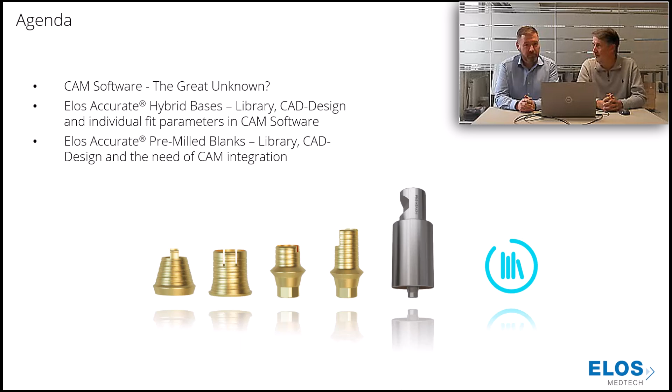Perfect, it's going to be great. Okay, coming to the first point of the agenda, I call it CAM software, the great unknown. As I already told you, digitization has been making its way into dental technology for many years now, but we are still more often familiar with analog processes.

I think we have a long process chain of CAD-CAM: we have CAD software, we have CAM software, we have machines. With CAD software, as a dental technician, you are much more familiar, because you just exchange the instruments with a digital one, using the mouse instead of the instrument. But coming to the CAM workflow, it's much more associated with the job description of a CNC technician or mechanical engineer.

That's why we want to focus on the CAM application in today's webinar. And we have a guest today. We have Iago from CIM System on board, and he's going to provide us with some interesting insights into the MillBox CAM software. Iago will first discuss the more general functions of the CAM before we later talk about the application for milling hybrid abutments and pre-milled blanks. So please go ahead, Iago.

It's your turn. Thank you, Rolf and Casper. I'm very excited to be here and be part of this webinar together. I will tell you a little bit about myself and the company as well. My name is Iago Leal. I am one of the engineers at CIM System, and CIM System is the developer of Millbox CAM, the easiest and better dental CAM software that we have on the market right now.

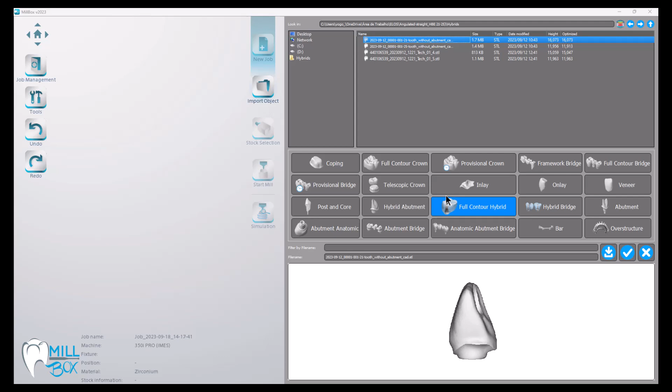All of these cases will be full contour hybrid, screw-retained crowns to be used with tie bases. And here I have 2 files from 3Shape, those 2, and 2 files from ExoCAD, those 2.

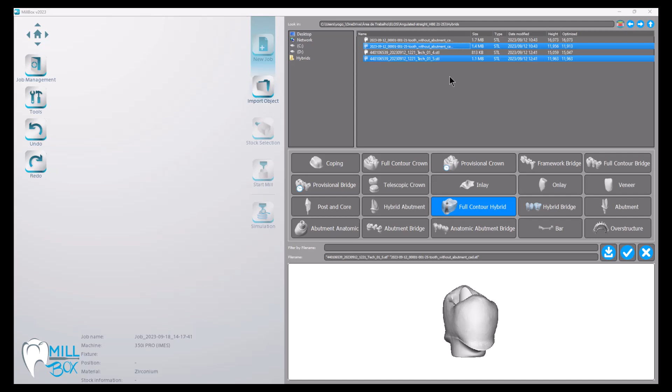The files from 3Shape, I maintain the metadata, but the files from ExoCAD, I remove the metadata to show you that Millbox can handle files without metadata, and it will automatically create all the curves and surfaces necessary for the milling during the import. So after the selection of our files and the correct restoration type, we can confirm and proceed with the import.

Here we can check that the software properly imported the files. So in this stage, we'll select our stock.

By taking a look at the top, we can see the minimum thickness required for this case, which is 11.96. So we'll be using a 12mm disc.

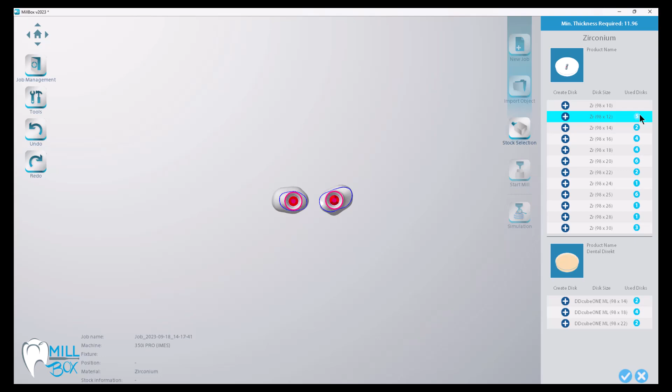I have 5 on my stock. I can click here, and the software will suggest to me the disc with the highest percentage of use that will fit all the restorations that I have imported for this project. Here it selected the 37% of use disc.

If I need, I can select a different disc as well. I will proceed with this one, so I will confirm. When I confirm, the software will nest my parts and will place the support pins.

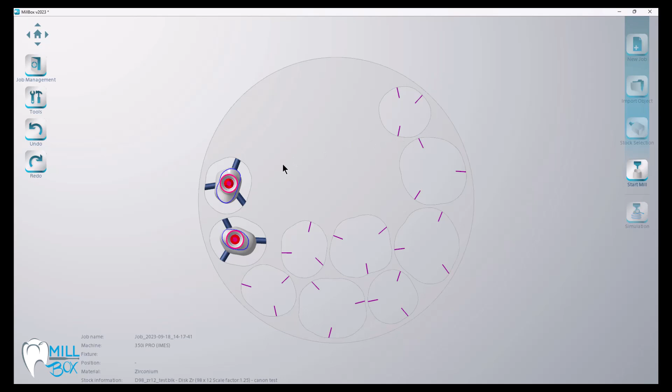If I want to mill like this, I can proceed and save a toolpath, create my NC file and start my milling. Otherwise, if you want to change something on the nesting, you can do it right now. So if you want to move your parts, you can simply drag and drop your STLs. If you want to rotate, you can use the yellow arrows to do so.

And this is an easy step of the software. So for the support pins, it's the same thing. If you want to move them, you can just drag and drop where you want the pins to be.

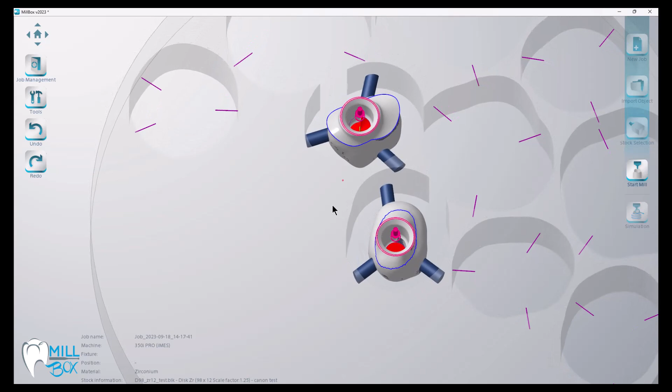We have 3 types and 3 shapes of support pin. Regarding the shapes, we have the round ones that you can see here. We also have the rectangular ones. And we have what we call the smart pin, that is this one here.

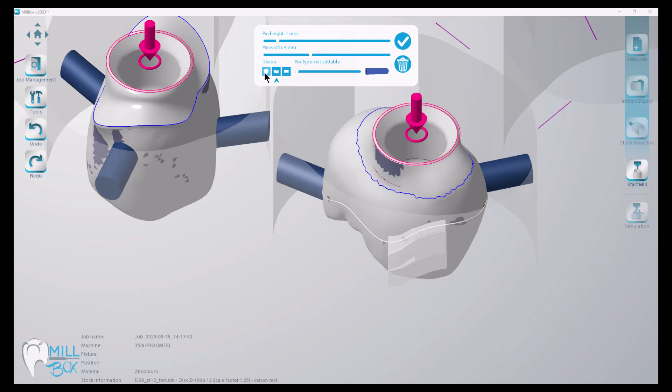When you click here, as you can see, the pin will try to follow the equator line to avoid undercuts. In this case, I will use the round pin.

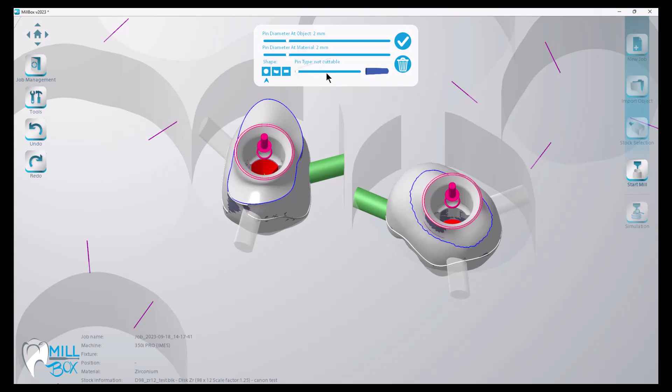For all of the pins, I can also determine if I want to cut them, do a semi-cut, or not. So I will define 2 of them as entirely cuttable, the green ones, and the rest of them, instead of selecting not cuttable, I will use semi-cuttable. So at the end of the milling, the software will do a pre-cut on those.

After I finish with my nesting, I can proceed with the milling and click on Start Mill and Save Toolpath. The software will display some strategy options available for this material, restoration type and machine.

If you want to have a better understanding of what that operation is going to do, you can click on the eye to see the toolpath it's going to use, like in this case, anatomic details.

And in this case, I will select the undercuts option to remove all the undercuts on my parts. And I will also use the 0.3 millimeter setting for anatomic details in this case.

Once I confirm, the software will start the calculation of my strategy, and it will display to me the tools that are going to be used for this case. So make sure that you have all the tools available at the machine side in order to proceed with the milling properly.

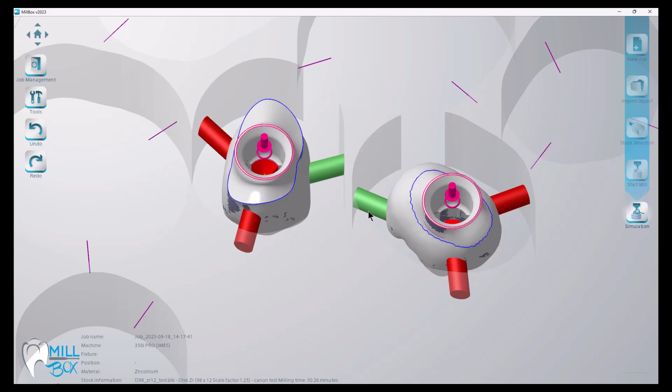After the calculation is done, it will display a message informing the path where it's saving the file that you need to mill the machine. After that, we'll have two types of simulation available for us to use.

In this case, we have kinematic simulation and residual. We're going to use residual to evaluate this case here.

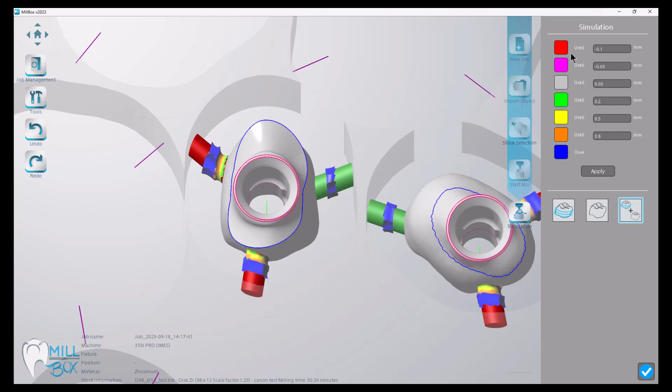Once the simulation is done, we can take a look at the cavity area of our screwed-in crowns and see if we can find any color different than gray, which would correspond to a millimeter we see here on this window. So by checking here, it seems that all we can see is gray inside of my cavity areas, which means we have no material left behind internally.

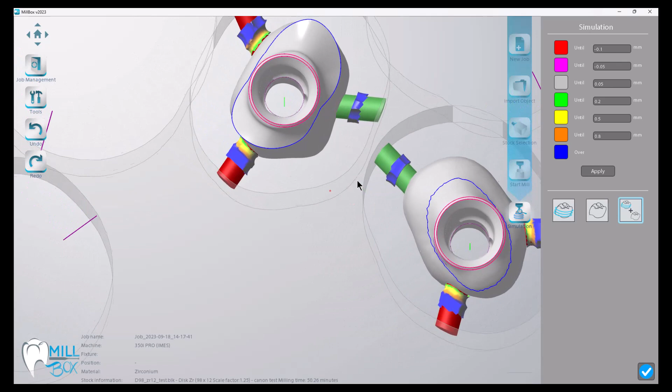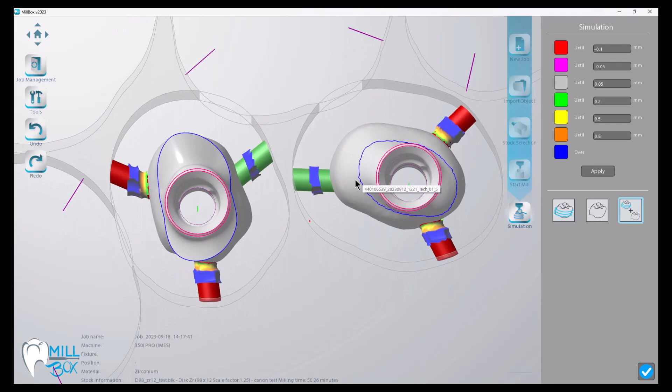The toolpath that was created for those cases properly milled the internal cavity of these two STL files. This tells us that we can expect a good fit from the milling of those cases, regarding the shape of those hybrids. We can confirm, and then take that STL and start the mill.

And now I'll return to you, Casper and Rolf, so we can discuss the next subject.

Thank you, Iago, for the interesting insight into MillBox CAM software and its basic features. So let's look at the next point, the Elos Accurate Hybrid Base itself, and talk about how the fit parameters are predefined in the CAD software and what you should pay attention to within the CAM software.

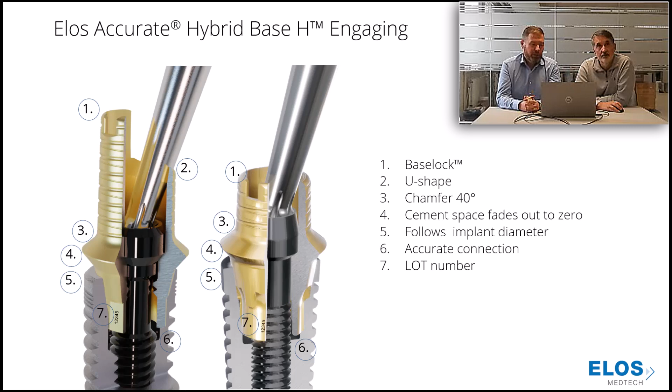Yeah, that's a pretty nice feature, I think, especially for a dental technician, because usually you finalize your bridge or your crown and then glue it, then give it to your dentist, who puts it in the patient's mouth and sees there's probably something to change, but it's still glued onto the titanium base. So this makes life much easier in the dentist office.

And again here, this small spring effect that we have is also tied back to the CAM software, because it needs to be exact.

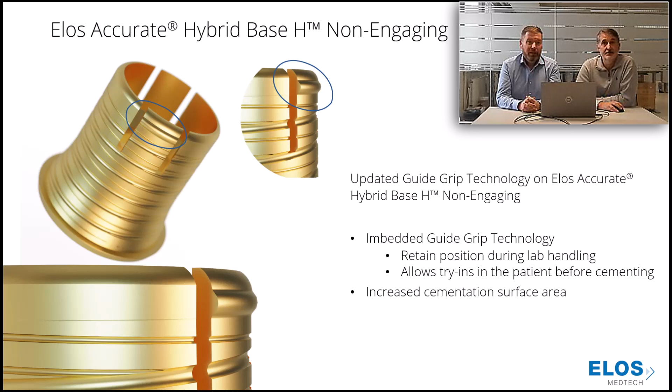Right, it has to be milled with the standard tools which are implemented in the software, right? Exactly. And if you look at the last slide here, we just look at the features.

Here we have the non-engaging. Again, we have the generation 1 and generation 2. And notice again the retention grooves on the side of it. This is a key feature when it comes to the retention. And we have our angulated screw channel. But let's look more into how the digital file actually works.

Yes, okay. So we talk a lot about the physical base now, or the hybrid base, but what about the use in the CAD software? Yes, and we would like to dive much deeper in the associated hybrid base CAD library and why the fitting parameters for hybrid base are predefined in it. Yeah, so there's still a cement gap predefined. So it's quite different to the cement gap you usually define with your crowns and bridges on dies, right? Yes, exactly.

So for us, it's very much important that we have our cement gap. The mating surface is predefined. Now, if you have a look now, this is just showing how it is integrated in the library. So you see the green colored analog and the hybrid base on top. But this is the crucial file. Yes. Even if you are not really aware of it because it's not the physical part.

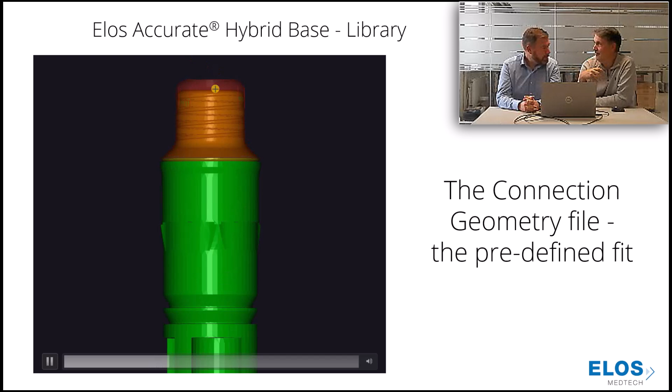We call it the base file or the connection geometry in the library. And this is how the internal geometry of your cavity in your designed abutment works. Yeah, so you have already predefined the cement gap and everything. Yeah, so this connection geometry file actually dictates the merge between the anatomical design that you're doing and the internal connection that will be inside the restoration. And this is governed by the library.

And as you mentioned, like a normal crown where you can set the cement gap yourself, this is not possible here. Here it's governed by this file in the library, and we have preset a cement gap thickness of around 40 microns. And we have, of course, done a lot of studies to show what kind of cement gap is actually needed to have the optimal retention. And that's why we have this exact file to make sure that we end up in a situation where we have the cement gap needed.

And what's also important here is to mention that it, of course, needs to be designed so it can be milled with your standard tools. Right. Therefore, you need this tool radius compensation, right? Yeah, so what you see in the gap above is that, of course, we need to mill the locking area, but we also need to make sure that the tool machines the entire connection geometry for the hybrid base. So that's why we have the gap above. This has been made so it can be milled with a 1 millimeter tool. So all radius here is 0.5.

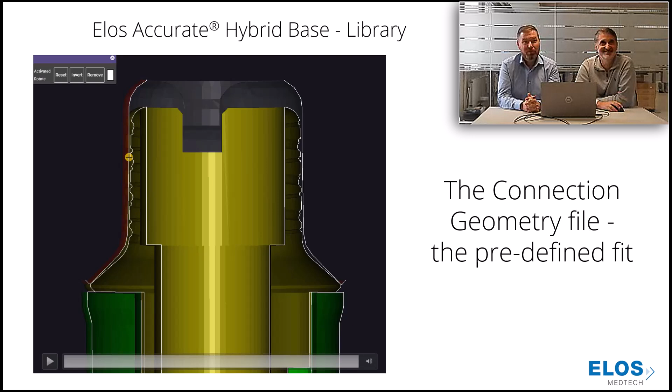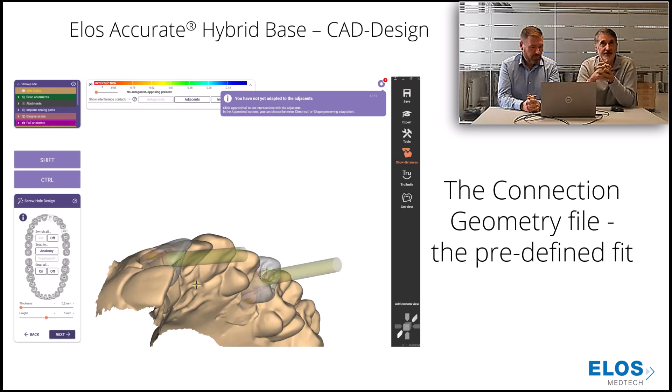So, okay, but how does the predefined base file appear in the design process within the CAD software? So let's have a quick look into it and how the internal fit of the designed abutment is created inside the CAD software. Yeah.

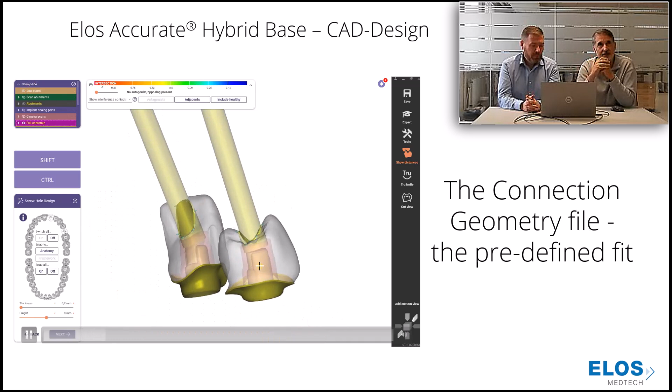So here you can see, I don't go over all the design process with matching the scan body. It's just to explain how this predefined base file is pictured in your later CAD output. So if you see here, we have some angulated screw channels, we have some straight screw channels.

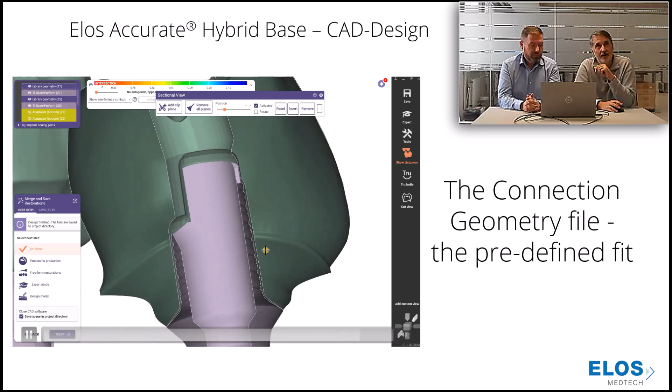And if I fade in the, let's say, physical hybrid base into this software and make a small section view in it, you can see that this base file geometry is already pictured in the same way in your abutment. So let's go to the section view and scroll a little bit, zoom in. Okay. Now you can see we already discussed it in the library, and that's what the library is creating in your final abutment.

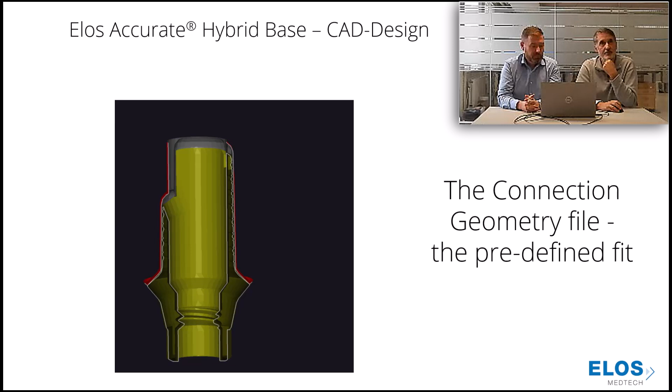So here we're merging the anatomical design with the governance file from the library. To make it a little bit clearer, I superimposed the final abutment with the CAD library. Okay, so this is the library? This is again the library, and you see this gap, and you see a section view through the hybrid base and its gap. And when you superimpose it with your final abutment, you see you already have the same gap now in your cavity of the created abutment, right?

So you know, maybe also from the customer support, that different technicians, different labs have different fittings. We have a lot of different zirconias in the market. We have a lot of different tools, a lot of different milling strategies, a lot of different sintering processes. And even if we try to optimize this base file, the cement gap, also based on our cement study, you can never balance it so that everyone is happy with the same cement gap.

No. And for sure, you can't change it in the library. That is governed. And as I mentioned, we're aiming at a 40 micron cement gap. What we have done with the mating surface of the connection geometry is that we actually put it at 60 microns because we want to ensure that we take into consideration the milling situation. It could be the accuracy of the burrs being used, the accuracy of the machine, the calibration, and all that. So we have some gap to play with.

I think it's maybe comparable with the 3D printing process today. When you have a model with dies in it, and you have different printers, different resins, different post-processing processes, at the end it hardly depends if you have an SLS or SLA or whatever printer, your result is always different. So you need to optimize the process or the settings to your individual process.

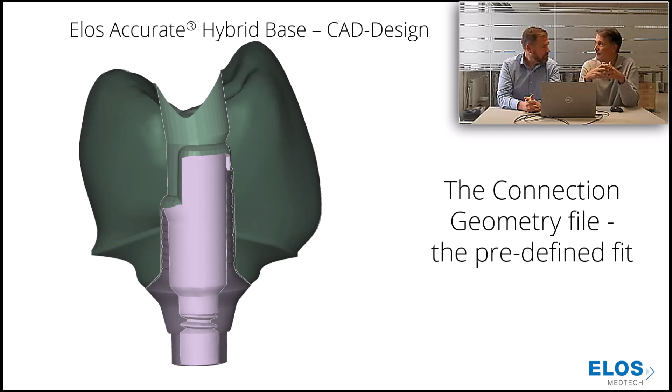And therefore we would like to go back to Yago to show us how a user can optimally treat such hybrid abutments in the CAM software. So what features the CAM has for this purpose, and also how the fit of the abutment on the titanium base can be optimized in the CAM software and adapted to your own individual manufacturing process. Yes, for sure. Let me share my screen and we can discuss a little bit about the HBE, that is the hybrid base engaged files.

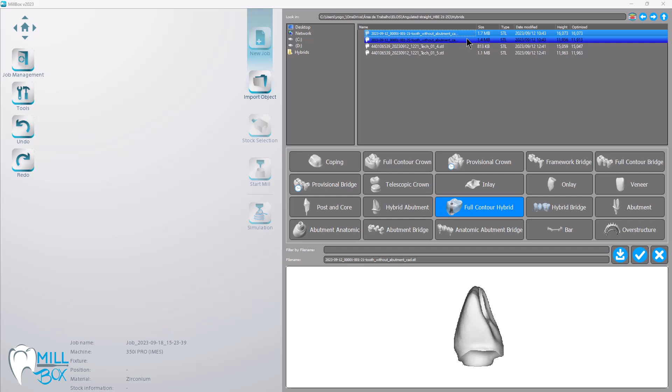So same as before, we can click here at new job to start our case. I'll proceed with the name of this job like this. You can select your milling machine and make sure that the tool set that you have selected here is exactly the same one that you have at the machine side. Select your material and then scroll down and select the fixture that you want to proceed with this job. Here in this case, I will import two cases from Exocad, selecting the proper restoration type. This is very crucial.

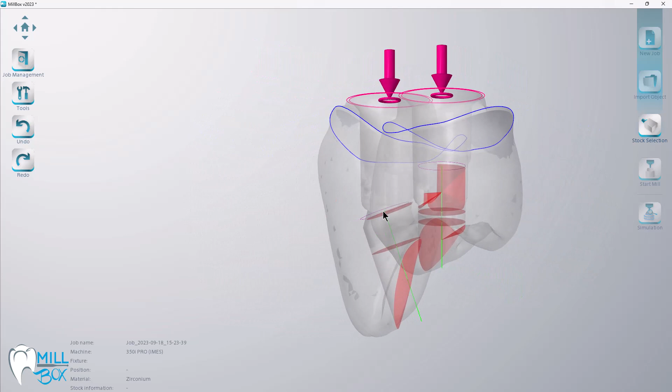So here, instead of proceeding with the selection of the disk, I will cancel, and I would just make sure that all of my curves are properly identified here in this case. So for hybrids, there are three main curves. The prep line curve, that is the margin line, this pink curve here. Another important curve is the drilling axis, that is this green arrow on your screw channel. It needs to be exactly on the center of your screw channel.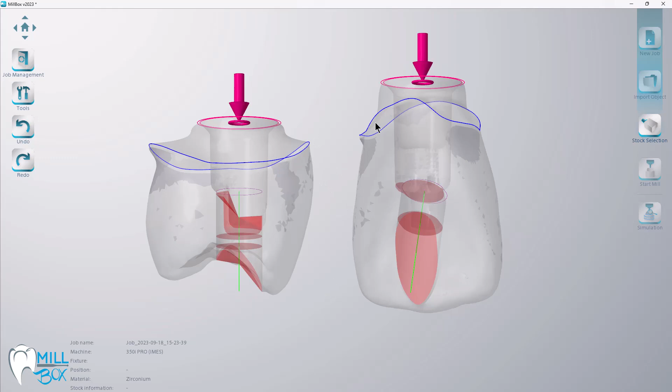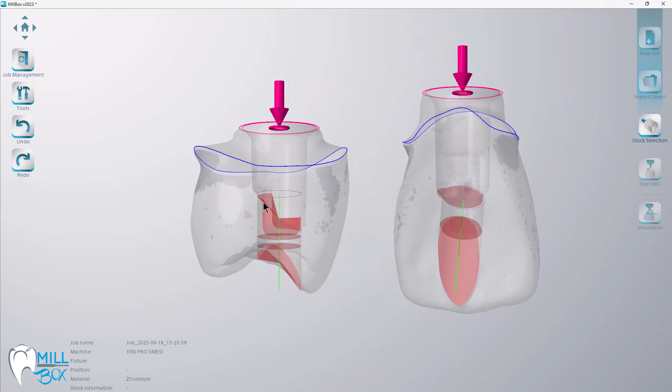And also the red caps closing the screw channel. They need to be at the top and at the bottom part of the screw channel, like in those cases. We also have a non-mandatory curve here. This blue one is just to identify the emergence profile area, but this is not mandatory. So one important thing here is to check if you have the red caps properly assigned. There can't be any red cap inside the cavity.

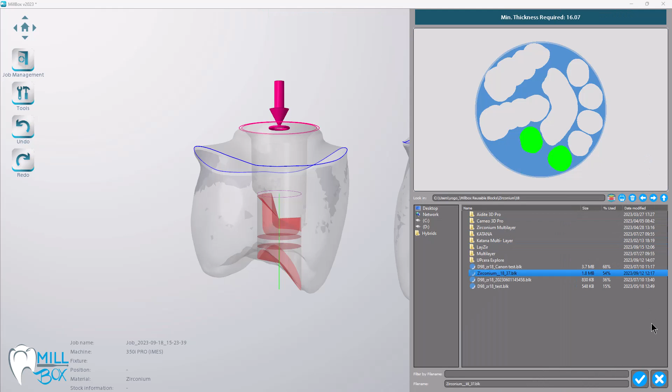After that, we can proceed with the selection of the disk. In this case, it's a 16.07. I will select an 18 height disk. I'll just confirm here. And then I will cancel. And then let's discuss a few things that you should be checking here.

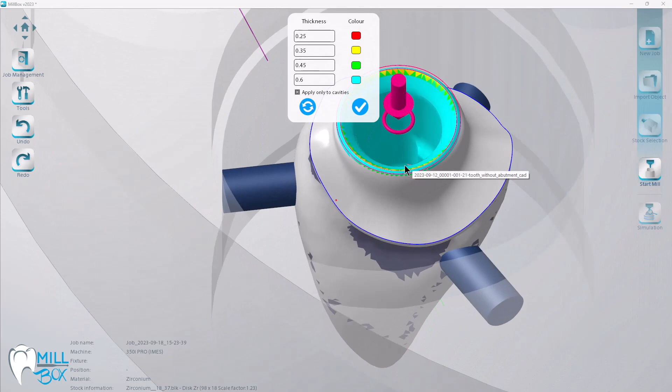So if, by the way, you are having chipping, of course, you need to check your machine and your tools. But it can be that the areas of your restorations are thin. So in order to check for the thickness, you can click on your part, click on the tools, and you see this option here to check the thickness of your STL file. By default, it will apply a color map regarding the thickness values that you have here. And then you can check for thin areas by checking the color map here.

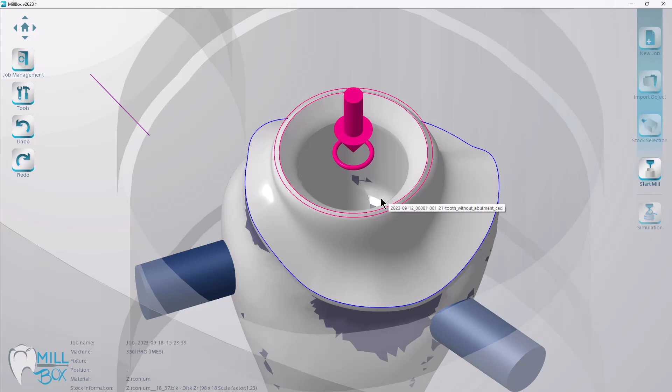Here, this part seems fine. You can also unclick this option to apply the color map on the external areas and see if you have other thin areas. If you're having tight or loose fits with your Ti bases, you can also apply a cavity fit in the software. You can click on your restoration, go on Tools, and then select this option to adjust the cavity fit.

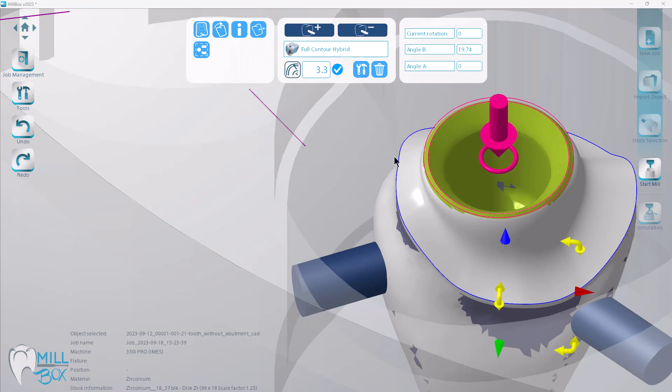And here you have values to control the fitting of your cavity by applying plus or negative values. Negative values will make your part looser, like the arrows, and positive values will make it tighter. So you can select one of the options here and make your part looser in this case. And as you can see, the software will display a different color to show you that you have a cavity fit applied in that restoration. And of course, you can apply it to the other restorations as well.

This is very useful when you're milling hard materials, usually like PMMA, for example, where the tool tends to deflect a little bit more and you have tight fits. So this is a really good feature that we have in the software to control the cavity fit. If you need, you can increase that value as well. And you can also determine this value as default for the software. When you import those types of restoration, it will apply during the import and you don't need to apply it manually after you import that part.

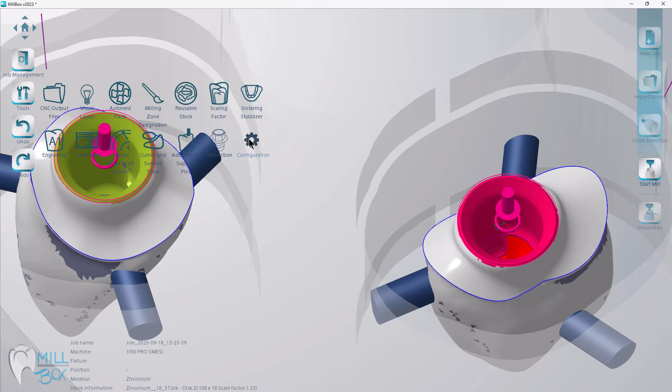In order to do that, we need to go on Tools and then Configuration. And then here we'll have an option for cavity fit. And you need to select the material that you want to apply that value as default, and as well your restoration type. So in this case, we'll be selecting full contour hybrid and we're going to apply minus 0.025 millimeters as default.

If you need bigger values or different values, you can also click on these green buttons in order to change the values that you have here. So for example, here let's change to 0.07, 0.06, and then 0.05. And if you go back to the software, you see that you have those values now available for you to select.

Okay, thank you, Iago, again for this interesting insight into the CAM software. As we can see, the CAM software is not only an application to calculate the milling path, it's also a powerful tool to adapt the milling results to your individual needs, right? So, last but not least, we will come to our latest development, the Elos Accurate Pre-Milled blank. I think the main difference to other abutment applications is that you not only need the pre-milled blank as a consumable material, but also need a pre-milled holder to process it.

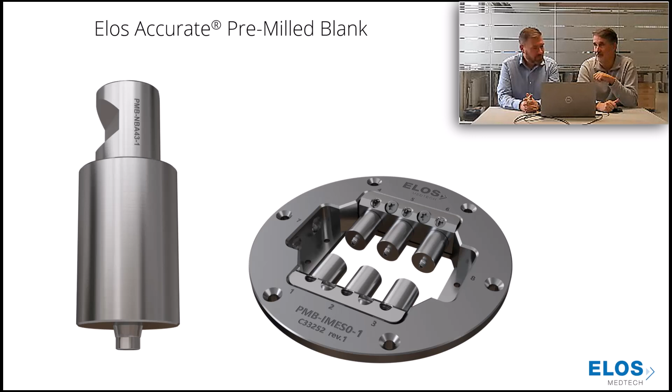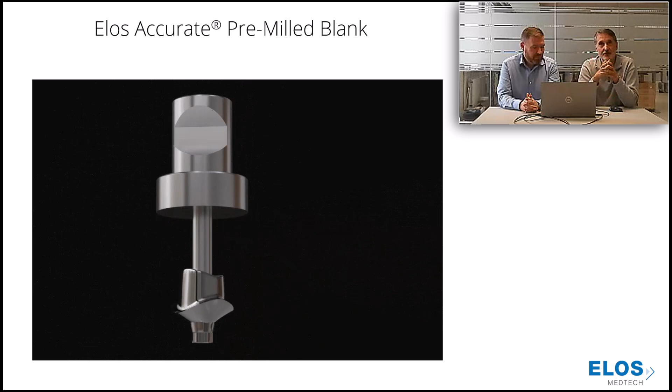So the pre-milled blanks allow you to design and manufacture one-piece titanium abutments in an easy in-house process. So when we look at this animation, you see that only the upper freeform portion needs to be milled out of the milling cylinder. So the implant interface is prefabricated. Meaning its higher precision and fitting accuracy to the implant is already defined and specified, right?

Yeah, exactly. So that means as an end user, you can easily focus on the individual abutment design of the upper part without having to take care of the fitting to the implant since it's already prefabricated. Exactly. So why use a pre-milled blank? Why is there a need for a one-piece titanium abutment? So what is the indication to use it?

So we all know today that ideally the abutment should follow the anatomical later prosthetics, right? So in the sense of a backward design, it has to take into account the individual anatomic conditions of the patient. So what are today's alternatives? Let's have a look at the stock abutment here. And we see with the stock abutment, you never follow the natural gum profile, right? So you have a lot of disadvantages in using stock abutments. They are often under-contoured and so give really poor support for the prosthetic crown. Okay.

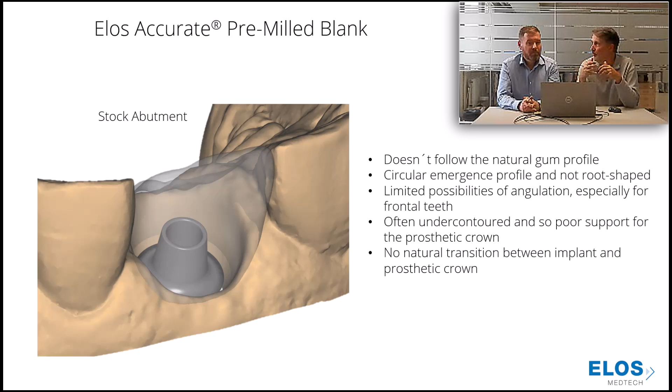But then we have our Ti-base solutions. We just talked about a hybrid base, and it creates a lot of advantages doing very aesthetic and individual customized abutments. But I guess it's not for everybody. Yes, I think it covers a lot of indications at the end. But however, in some cases, this may not be the ideal solution, even if it allows you an angled screw channel like Elos Accurate Hybrid Base.

Yeah, so for example, you see it a little bit on this picture. Sometimes you have very limited space. And then, due to the minimum wall thickness of both the titanium base but also zirconia, you need to have wall thickness, and so the abutment will be thicker than you probably need it. Also, you have less design freedom in case of very angulated frontal teeth.

Of course, yeah. So especially in the frontal area, sometimes you have very narrow gaps. And then if you put in a hybrid base and add on the minimum wall thickness of a zirconia abutment, it fills the gap completely without having the crown on it. Yeah.

So when we look at a pre-milled abutment, it can offer you a very good alternative here, as it allows you to set the starting point for the angulation of the abutment almost closer to the implant shoulder. Okay. So it also offers very good stability when the space is limited, because there's no need to combine different materials. Okay. So that's the whole philosophy about the pre-milled blank.

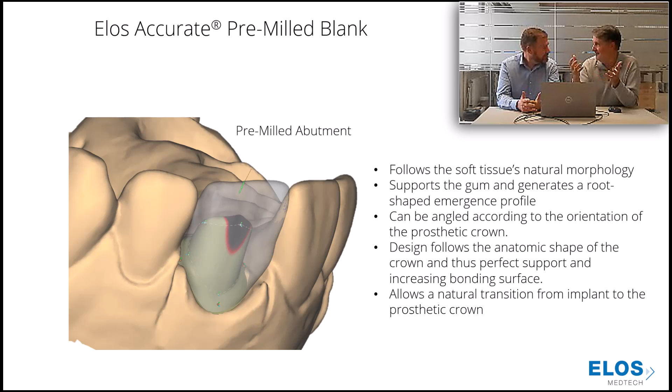A little more design freedom in these critical areas. Yes, more angulation of the abutment itself, not just about the screw channel. Yeah, also more stability in cases you have limited space and so on. Okay. Yeah, you create, so to speak, your own gingiva height. Yeah. You can say that. So more freedom. A little more freedom. That's good.

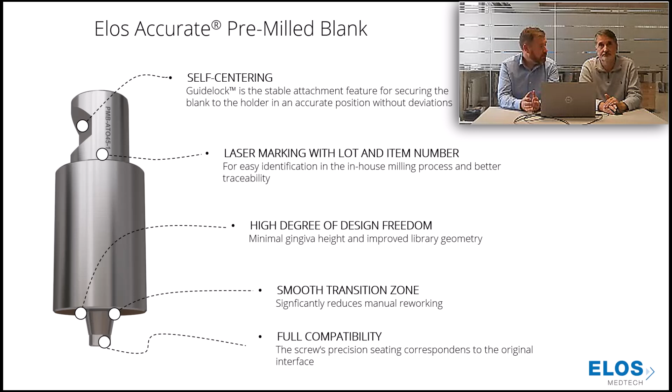Okay, so just a quick glance at the new Elos pre-milled blank. We have a lot of features here. We're not going to go into the details, but we have our locking area, which is important because we need to know exactly where the pre-milled blank is in its holder. And here we see the holder with the pre-milled blank. And again, a lot of features. This is not what we're going to go through now, but here we see the modular system that we have.

And what we're going to go into next is the importance of actually making sure that the machine knows exactly where the position of the pre-milled blank is and where the abutment that you design actually fits into that. And that's the whole integration part about this pre-milled solution that is crucial, and where the CAM plays a very big role. Right. So it's not just about the precision of the physical parts here. No. It's also about how accurately it is implemented in the CAM software.

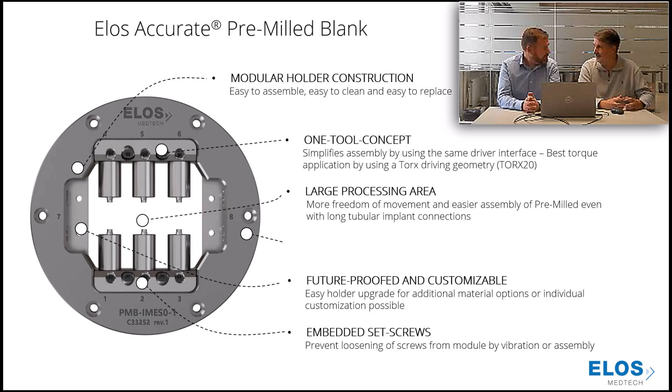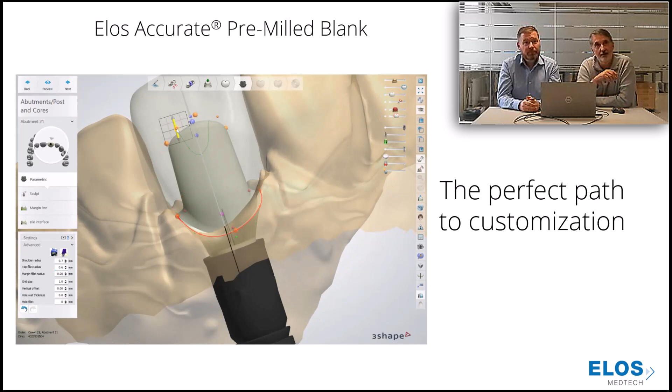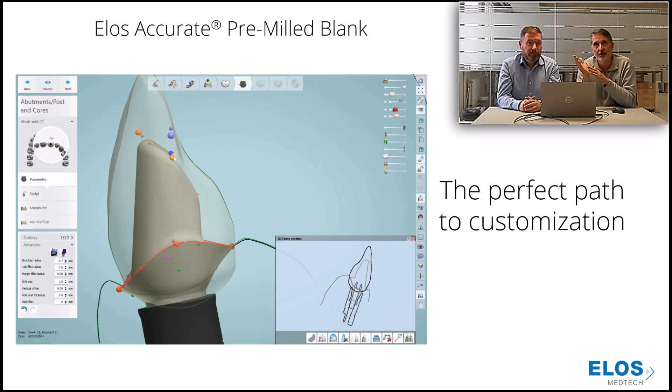Right. Exactly. Let's have a brief look into the CAD software, how to create this abutment. You see, after you positioned your anatomical tooth, you are allowed to design exactly your abutment following the angulation of the crown axis, and you can see in the section view that you can easily shorten it, angulate it, adapt it to your anatomical outer shape. So the tooth is like a digital shell around, and you can adapt the abutment very easily to it.

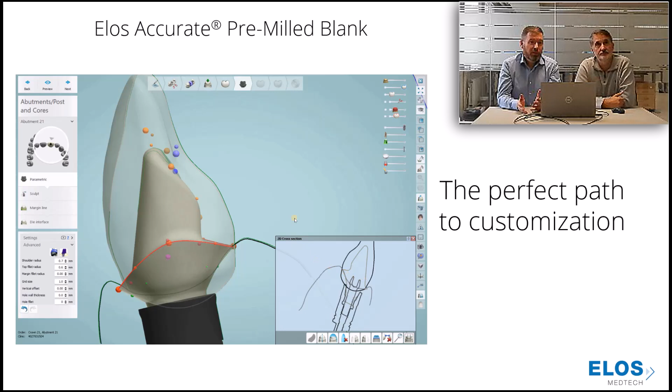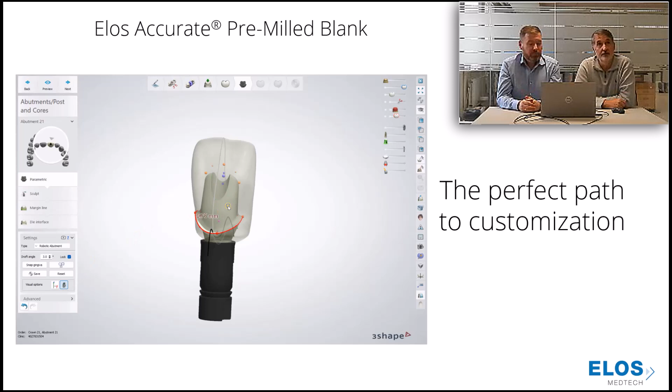Okay, so this gives you a little more design freedom, and you can do a little more customization. Right. But you also need to be able to actually machine what you design. Yes, right. And you see here in this case, you can create your own gingival height, as I told you. So that makes it pretty nice to support the gum and to relocate the cement gap to the upper level of the gum.

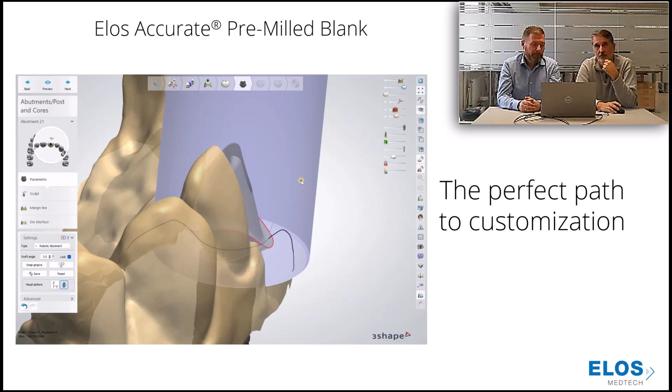Now you see the pre-milled blank and how it's finalized with the screw hole on it. Okay, as we already learned talking about the features of the pre-milled blank and the corresponding holder, the correct positioning during the milling process is one of the most important requirements here.

Yeah, absolutely. So in order to prevent the blank from being positioned incorrectly in the XY plane, we have designed these green marked areas in the holder module and blank, so that the blank is always fixed, stable, and clearly positioned in the holder. Yeah, and this ensures us that we have the blank where it needs to be. Yes, right. So now we need to tell the machine where the blank is. Yes, right. So the same we have for the height offset.

So an offset in the Z plane would result in an abutment shift, meaning that the height of the abutment would be too high or too low, and that it's maybe not in the right position relative to the prefabricated implant connection. So this small animation shows you how the blank is automatically pulled down to the module, into the position, which is not just important in regard to the physical position of the blank. It's also important that this position is also the same in the CAM software.

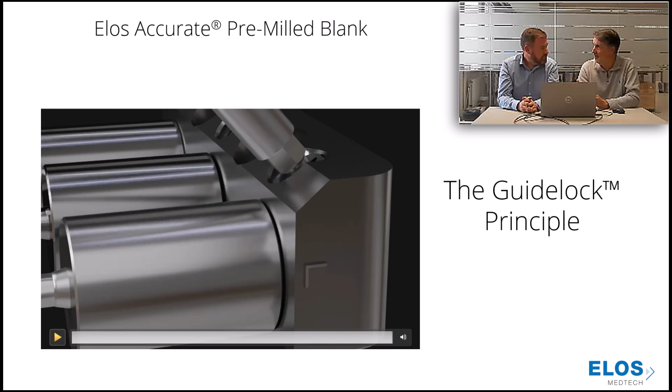Exactly. And this easily bridges us to the CAM software and the importance of the correct position of the pre-milled blank inside the CAM software, not just in the machine. No, exactly. So let's have a look at that.

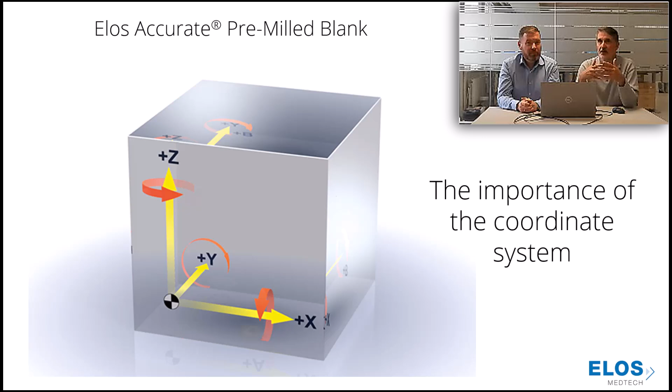So from a mathematical perspective, whenever we talk about the position of any object, we are always talking about coordinates of an object, right? So you may know this topic from your GPS tracker, or for example, a chessboard is also a coordinate system. It's a two-dimensional coordinate system where it precisely describes the position of your figure on the chessboard, right? So since each position of an object in a milling machine has a specific coordinate, a reference system such as a coordinate system is required as part of the kinematics of the machine.

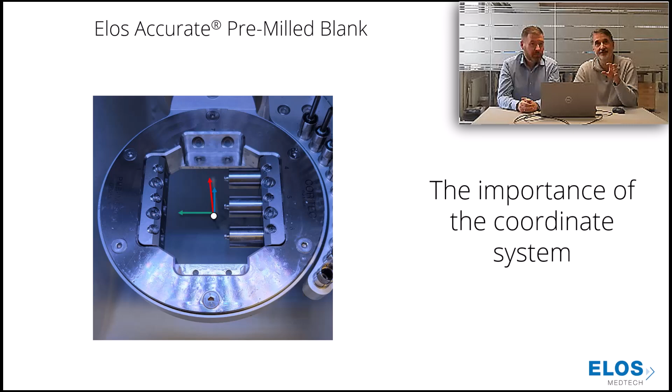So how does this really look? And now you see how it looks in the machine. For sure, the coordinate system is not visible like in this picture. But since the milling paths for milling the pre-milled abutment are calculated in CAM software, each individual position of the milling tool in the milling path is a single coordinate. And if we superimpose it with the CAM software, you see you have the same coordinate system inside the CAM software. So it has to match to the machine, because otherwise the milling paths are calculated in a different position.

Yeah. So the CAM software doesn't know what position the machine is in. Yeah. So we have two coordinate systems, one in the CAM software and the other one in the machine. And it needs to align perfectly to have the desired result. Right. It has to exactly align and match. Otherwise, you have deviations in your milling result.

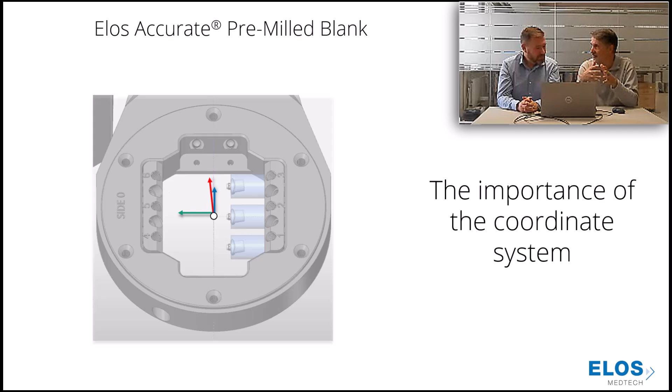Okay, Ralph, so what happens if these things are not aligned? And I guess we will see something of what you display here. Yeah, it's a bit dramatic pictured here, but at the end, you will have maybe a poor surface of your milled abutment. Or in worst case, you probably have a tool break or a collision inside the machine.

So it's important to remember that a holder and a pre-milled blank must both be manufactured very precisely so that the blank is always positioned correctly in the holder and that the physical position of the blank corresponds to the already defined position in the CAM software. Yeah. So that's the manual handling here. You need to make sure that the pre-milled blank is in the correct position.

We need to make sure that everything is clean, so you actually have a good and precise seating area. Right. So if you have grinding chips inside the slot of your holder or whatever, you have to clean it before, because otherwise the position in the machine is different to the position the CAM expects the blank. And then you will not end up with what you actually expected. Yeah, that's right. So what are we seeing here?

Yeah, I think when you create your design in the CAD software, you're always really focused on the STL file. So everybody knows when I create a crown or a bridge or an abutment, you get an STL file. And that might be the most important file for you because it shows you the design. But on the other side, it transfers no additional information. It's not really a CAD file. No, it's a point cloud on the surface. It's a triangulated point cloud, not more. And it gives you no information about the implant system you have used, or what orientation.

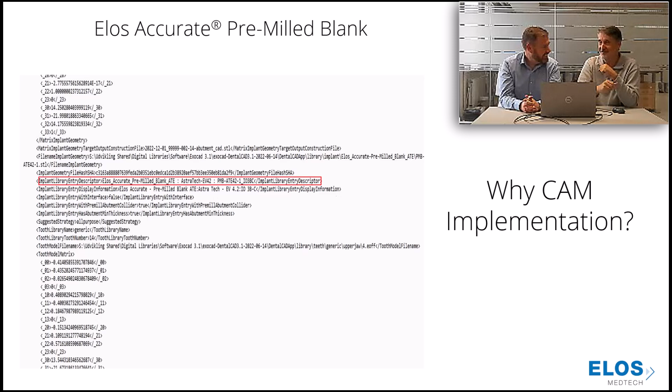But if you look in it, you see this implant descriptor line. This is, for example, the keyword the CAM needs. So when we talk about CAM implementation, this keyword has to be implemented in the CAM software.

And then when you import later your CAD file with the construction info to get the metadata, the CAM reads these XML files and tries to find the right keyword. And if it finds the already known keyword of the CAM, then it matches - it easily knows it has to call from the database the right blank.

So if it's a Straumann bone level, for example, the keyword says this is a Straumann bone level, it's the Elos Accurate system. The system automatically calls up the right folder and so on - everything is automated, and it will also automatically place it in the right position. Everything is automatically nested.

So we talk about a lot of complexity here with CAM integration, but it's just to give you a small picture of how it works. In daily work it's much easier - we just import it, and it's a fully plug and play process.

But I guess Iago is going to show us how it actually works. Yes, right, Iago will show us in the CAM software how easy it works. Iago, let's go.

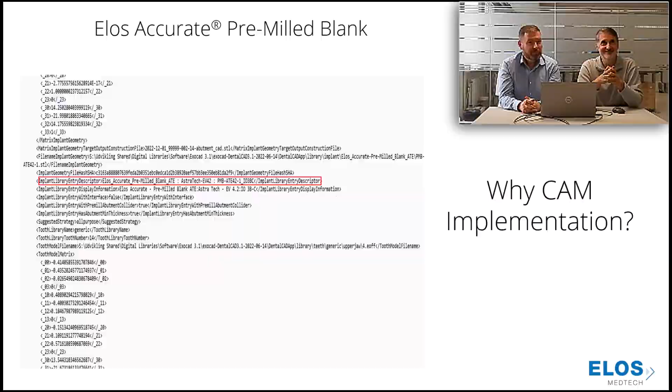Let's discuss a little bit about the pre-milled blanks. The workflow is pretty simple and very similar to the other workflows we have in the software. First we need to click on New Job, select our job name - in this case I will select the 350i Pro machine. For the pre-milled blanks, I will select titanium material.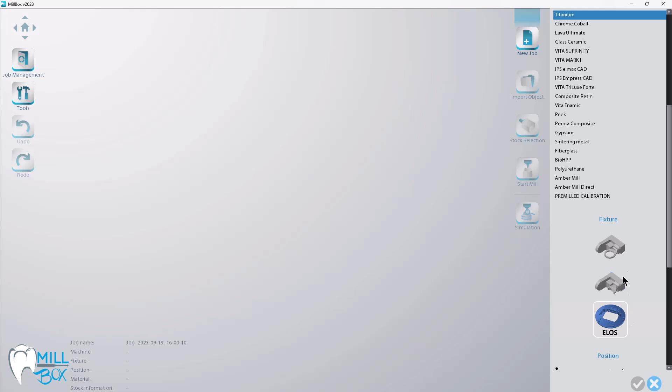And you should have the fixture - like this is the Elos fixture - it should be available for you if you have this on the software. After selecting the fixture, you can select the position. For this fixture specifically, we have 6 positions. I will select number 1.

And now we can import our file. Same as before, I have here 2 files from Exocad and 2 files from 3Shape, and all of them have metadata. So when you have a metadata file like this one, when you click import - as you can see here, we are on the 3Shape folder - the software will read the metadata and will automatically import the correct blank for you, because we know exactly the CAD library that was designed for this case.

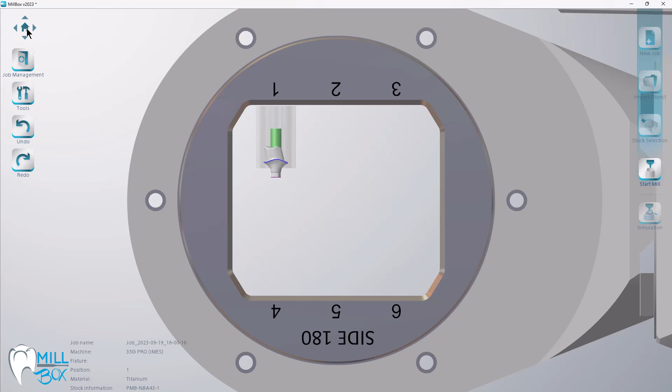So here I'll just hide my red caps and enable my fixture so we can see it. As we can see, our abutment was properly imported and nested on position number 1. So there's nothing I need to do for the nesting - it's pretty straightforward. If I want, I can proceed with my calculation now, but I will import another abutment on position number 2.

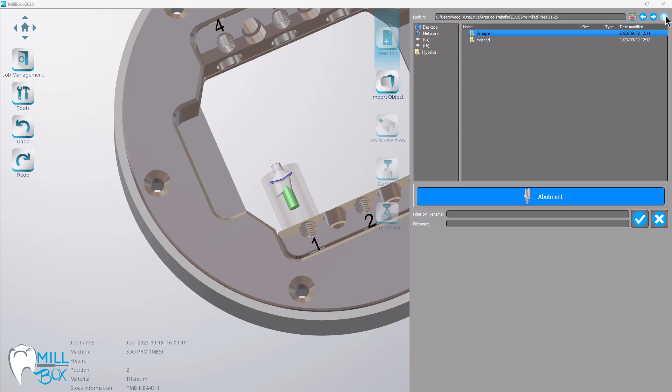So now I will import an Exocad file here, and same as the 3Shape file, I have the metadata, so the software will find my block and import it automatically. I don't need to do anything here.

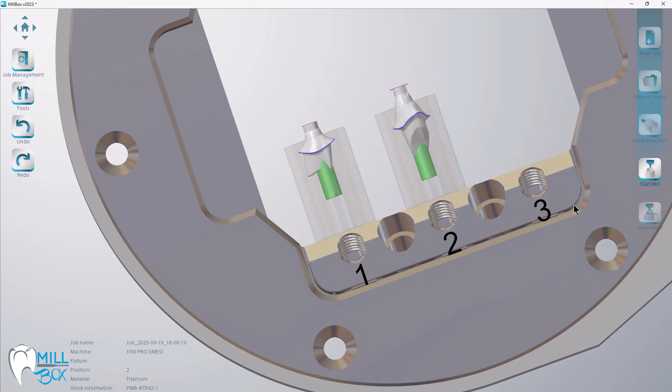Okay, so now let's take a closer look at our case here. As you could notice, the software did all the nesting automatically for me, so the position seems fine. It placed the support pins in both cases with the correct diameter, so it seems fine in this case.

I will import the third case, but in this scenario, I don't have the metadata. This means the software doesn't know exactly which is the interface by checking the STL file. So what I will do here is basically import my file without metadata.

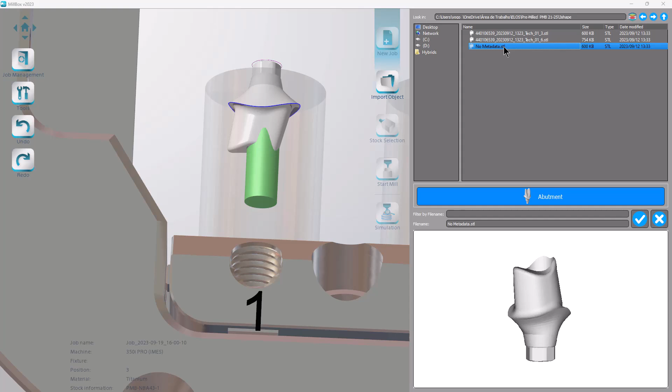The only thing I need to do differently than the others is manually select my pre-milled blank, so in this case, this one. I will just select my blank and confirm. After confirmation, same as the other cases, the software will place my STL file on the blank with the support pin, and that's it.

Now we can start our calculation. When I click on Start Mill and Save Toolpath, the software will display some strategy options that I have for such cases.

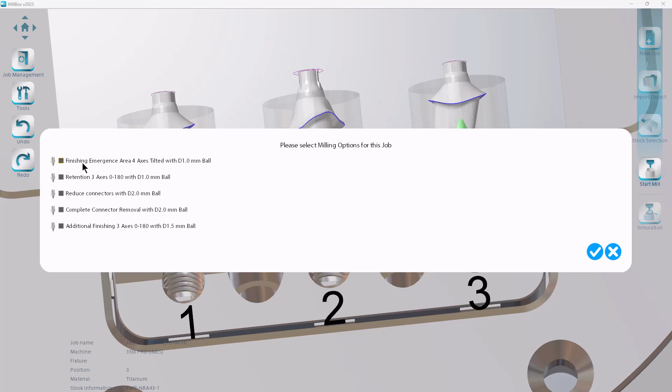In this case, I have 5 options. Let's discuss the first 2. This one, Finish Emergence Area, means if we click on this option, the software will apply another finishing on the emergence area. The retention option will mill some grooves at the top cap part of the insertion, so we have a better cement bond. So I will select the emergence finishing and also the retention with the 1mm ball.

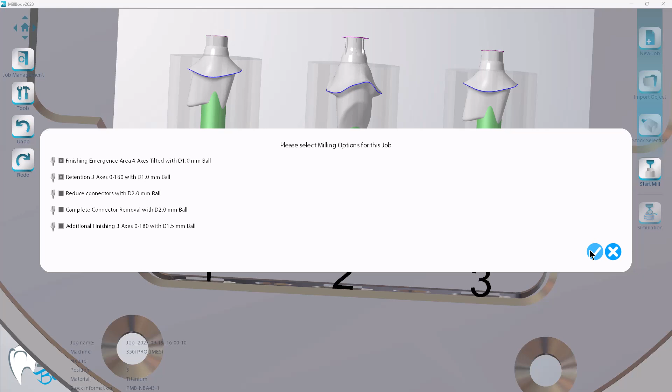I will confirm, and now we just need to wait for the software to calculate. Same as before, the tool list will be displayed to you. Make sure that you have all those tools at the machine.

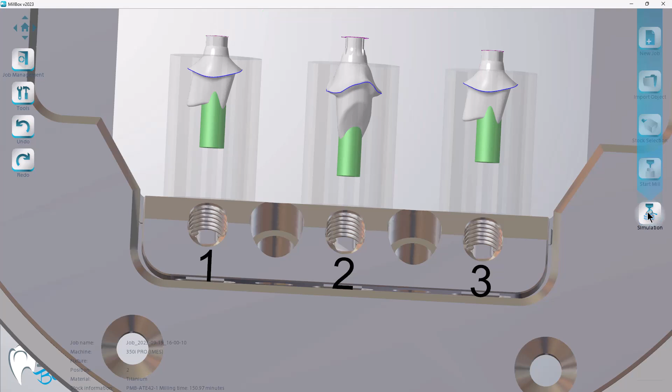Now with the calculation finished, let's check the kinematic simulation. In order to check the kinematic simulation, you click on Simulation and then Kinematic Simulation.

Once the simulation is open, we can maximize that. I know it has a lot of options here, but there is no need to be afraid of the simulation. Basically, all we have to do is run the file. If we need, we can hide a few options here, so I just hit the toolpath.

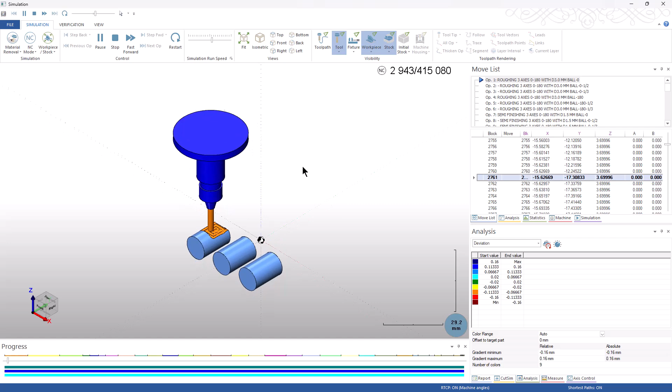Let's take a closer look. Here at the kinematic simulation, you can see the movements the machine will be doing to mill your case. You can speed up this process if you want, or simply drag and drop the progress bar at the bottom for a fast end result. So we can just drag and drop this, and the software will calculate the left material.

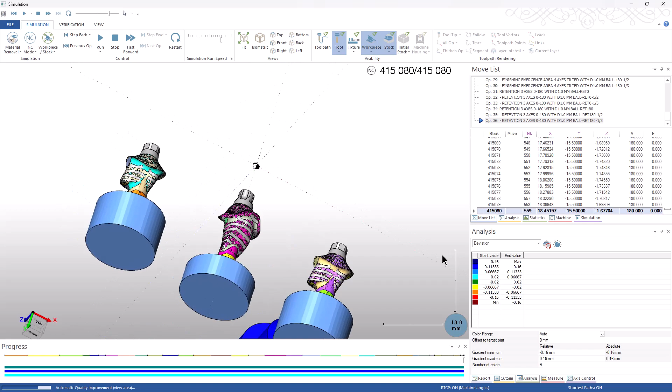Now that it's finished, let's take a look at our result. This is the result that you should be expecting the machine to deliver to you. Let me hide my tool here.

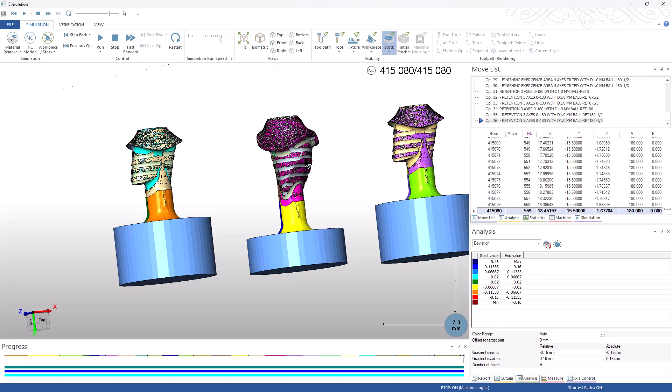These grooves that we see here are caused by that option we marked at the strategy to mill the retention. This will create retention grooves in order to make the cement with the crown better. As we can see here, it creates those small grooves, which form mechanical retention for the cement to be better. So when you're cementing those abutments onto the top crown, it has a better mechanical retention.

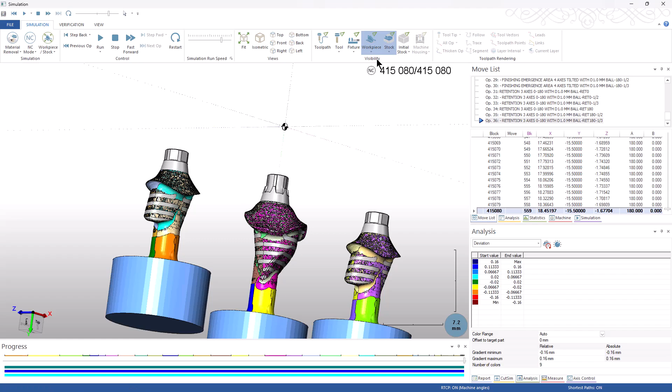So this is the result we should be expecting to see at the machine. Of course, the machine needs to be calibrated with the correct tools in place and everything else. I would like to thank you for your time, and I hope you appreciate what we discussed here. And if you need something from us, just reach out.

Thank you. Okay, thank you, Iago, again for this deep insight, it was pretty easy to use. It looked really easy. We talked a lot about coordinate systems, so we can't forget it again. Yeah, no, it's pretty easy. So everything is automatically nested here. Yeah, but it was interesting to see what goes on behind the scenes, because it is really complicated and there's a lot of work into it.

Yes, and if it doesn't work, then you know it helps you get a little bit more background, because there is a CAM implementation missing, or you don't have the right version of the CAM, or you didn't update your database of the CAM. So it's good to know a little bit of the background to handle it if any issue comes up in this process.